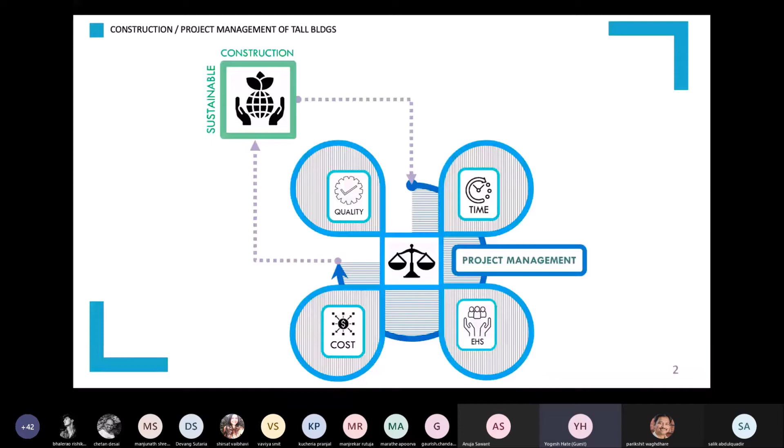So going back to the previous thing, we always talk about projects in terms of their quality, the time taken to take the product to the market, or the cost efficiency on a square feet basis. But there are so many other aspects that overall lead to the project management criterion of a particular project. It's very, very akin to an iceberg - what you see at the top is probably one-fifth of all the processes that go into it. So I'll touch base on a few of these.

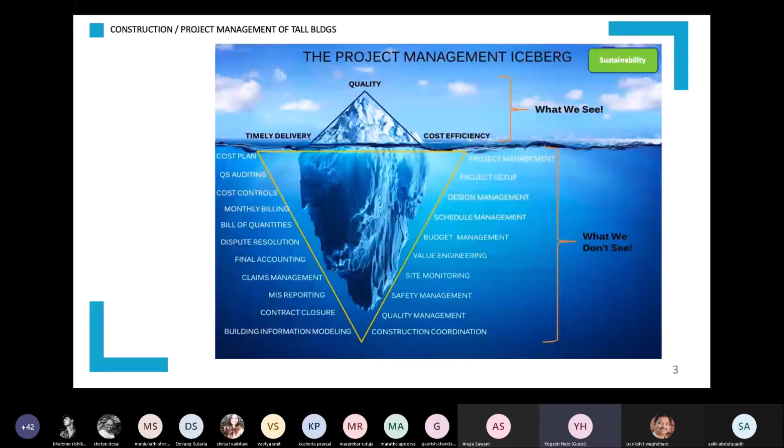There are quite a few videos I have that I would like to show you, permitting time as well as my internet connectivity. Before we get into that, I would like to quickly take you through the traditional versus modular construction techniques that we employ. You will eventually be designing your buildings to suit these construction methodologies. This is not something just the guy in the field, or the civil engineer, or the project manager handling that project has to worry about - you will have to cater, you'll have to design to accommodate these newer techniques.

For example, the 2 at the bottom that you see on your screen, 3D printing or top-down construction methodology - very interesting, I'll quickly take you through this. The first 3, of course, are RCC, the standard way of doing buildings. Steel - slowly India has started warming up to the concept of constructing buildings in steel. And prefab - there are quite a few buildings in Mumbai today which have been built with prefab construction methodology, with some inherent flaws that we need to overcome over a period of time.

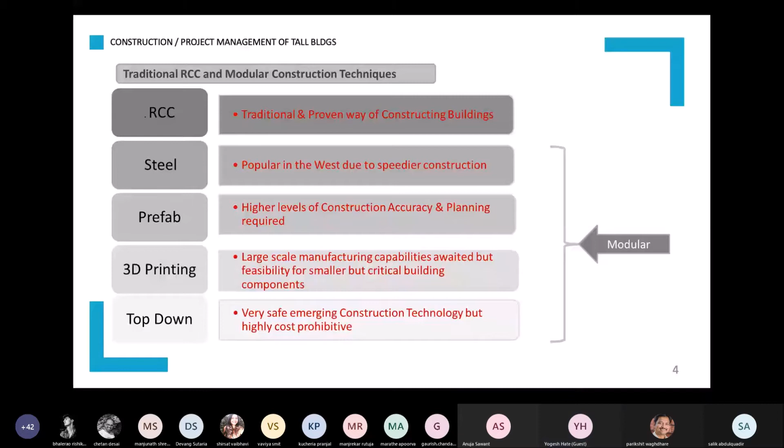So what happens with steel buildings is we get a very good speed of construction. They are lighter in their dead load, so you have lesser loads on the foundations. Most of the fabrication is done in a factory-like environment, so you have good tolerances and good quality control. The only issue, or the biggest issue, with steel buildings is their lower fire resistance, and the remedial measures needed to make these buildings fireproof are very costly - in certain cases, cost inhibitive. At the same time, we have lesser skilled manpower or technical know-how to build tall buildings in steel. But going forward, I feel this would be the technology of the future.

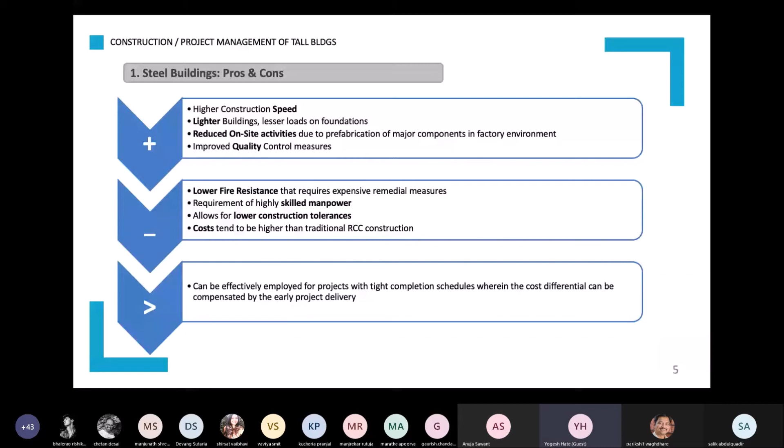So it's possible to build high rises with steel. Some of them have stood the test of time. The one you see on the right hand side is a photograph of a building called the Shun Hing Square Tower. It's in Shenzhen. Its claim to fame is that 3 floors were constructed per week. This is possible only with a steel building.

India, like I said, is slowly warming up to this idea. Eventually, you will be designing buildings in steel.

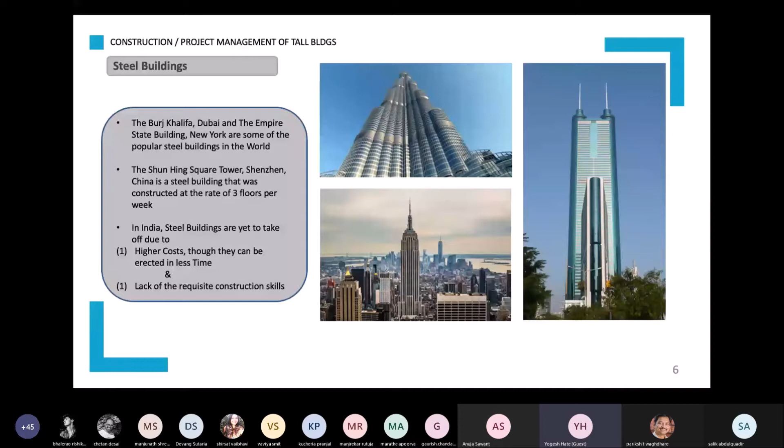Prefab buildings. What happens here is basic components, columns, slabs, wall panels, beams, anything you can think of, even the facade elements, they are all fabricated in a factory-like setting. They are precast, brought onto the site and assembled. It's more like a Meccano or Lego blocks kind of construction.

Only issue here is the construction joints. The treatment thereof has to be done extremely carefully. A few projects I mentioned in Mumbai have failed due to their inability to stop water ingress into these buildings. Very large projects, but unfortunately, the remedial measures cost probably half of what the original construction costs were.

This is a very interesting building. You'll find this on YouTube, you should really check this out. This is called the J57 Mini Sky City. It's in Changsha, Hunan province of China. Built in only 19 days. When I say built, it was assembled. There were about 3,000 odd modules or components that were brought onto site and erected, in a time frame of just 19 days.

That's why you see the number of tower cranes, 1, 2, 3, almost 6, climbing tower cranes that were required. Imagine the logistical nightmare it must have been for the guy on site to receive all these components in a particular sequence and erect them. From an architectural standpoint, you might notice not much scope for facade elements or elevational treatments, just a plain blank building.

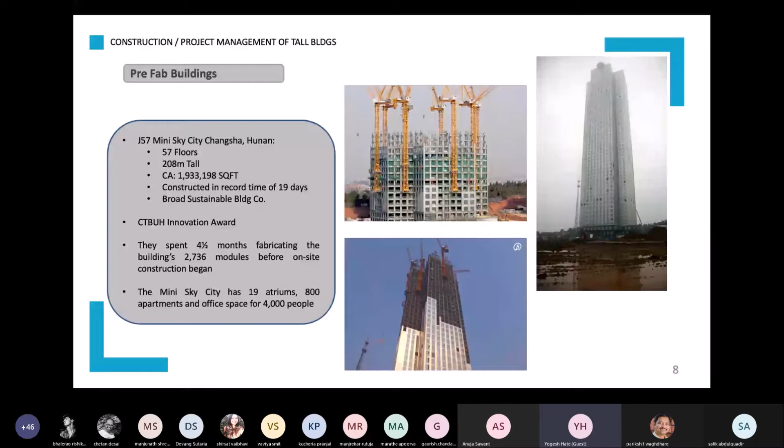But that's something that's coming up. Eventually these buildings will catch up. Another similar building is this T30 hotel. It's probably 2 kilometers from the building we saw on the earlier slide. I've been to this site. It's 30 floors, and now we are coming down to hours - it was installed in just 360 hours. It's a hotel building again. For whatever reason, both these buildings are unoccupied at this point of time.

But that's not the point. We are looking at construction technologies. This is what is possible. This is how time can be saved. Look up Broad Sustainable Building Group when you get a chance, you'll get good information.

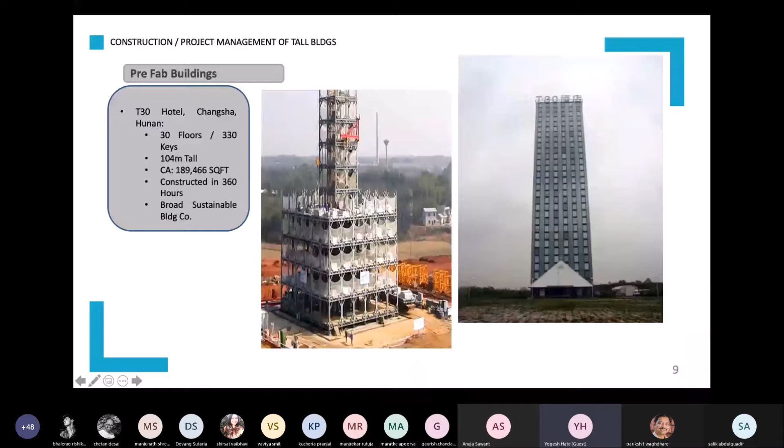Not to be left behind, this is again a building done with prefab construction technology in India. This is in Mohali, Chandigarh, not a very good looking building, you'll all agree I believe. But again, erected in just 48 hours flat. It's a hotel building.

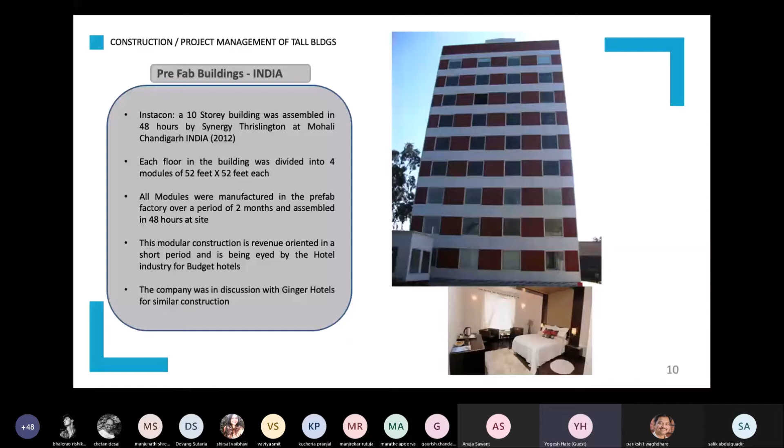Okay, prefab - there are certain components you'll have to account for when you get to the sites. I was talking about sustainability in construction, not a sustainable building, but sustainability during construction processes. We want lesser amount of concrete waste going to the landfill. So typically on our project sites, for formworks for stormwater drains or precast stairs, we have the molds ready. We do not fill them,

but any leftover concrete, provided it is the right grade, goes into these preformed formworks, and you have a good quality product. At the same time, you're not wasting that concrete. Wasting that concrete is not just the money you'd spend on throwing it away, but it's also to do with the landfill. So these are the green building processes that go on site.

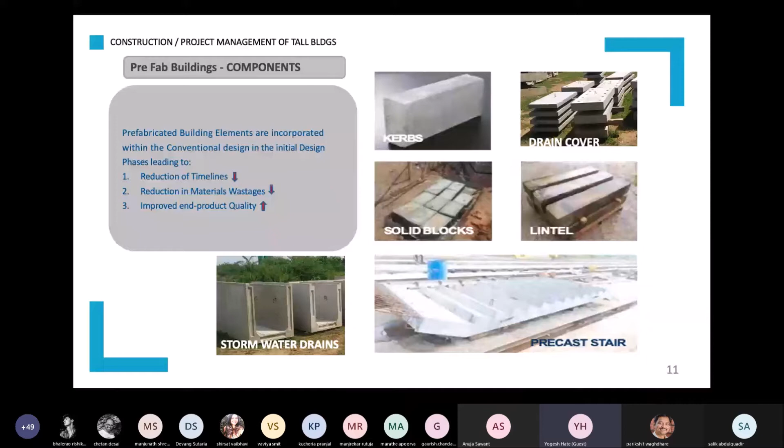Before we move on to the next technology, let me quickly summarize the construction time and cost - how do these buildings differ? Theoretically, I've taken a building with about 14 stories, 3 basements, foundations, and if you see the RCC column, you can finish the structure in probably 24 odd months, about 2 years, including excavation. The same building in steel can probably be constructed in 17 months. Again, this is very theoretical, just an exercise done so you understand the difference.

A prefab building could probably be completed in 20 months. So it's very clear that the steel building would be the fastest one to be completed. But when we move to the cost side, if we take the RCC building as a baseline for our cost, the prefab building is probably 20% over and above the RCC building cost, whereas the steel building can go as high as 25% more than an RCC building.

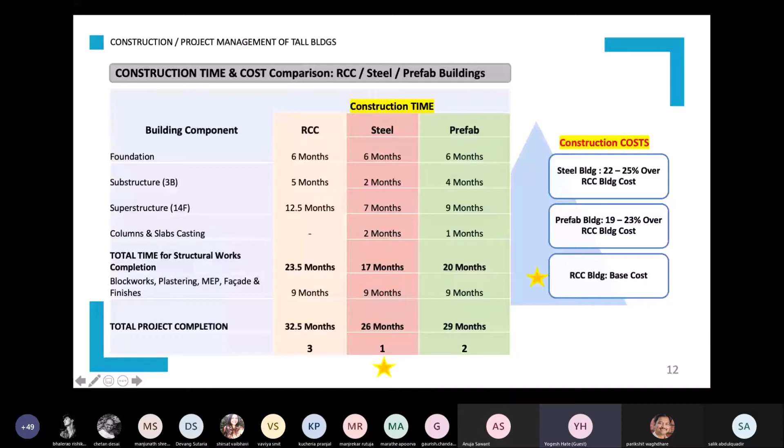3D printing - I'm pretty sure you're all well versed with the technology. It has been used for a multitude of products, but it has entered the construction industry as well. At this point of time, there's not a single building in India that has been constructed with 3D printing technology, to the best of my knowledge. But sooner or later this is going to be reality, and within the next 10 years of your career, you would be designing buildings that will be 3D printed.

Let's quickly look at a nice video, I'll show you a few of those. Good speed, highly mechanized operations, very safe for workmen, but the technology is still in its infancy, and you have to really tie up with someone who has a patent for these kinds of systems. So the costs at this point of time are very high. Full-fledged buildings have been built in the US as well as in Abu Dhabi. They call it low-cost housing, but it could very well certify as a nice villa somewhere in Lonavala.

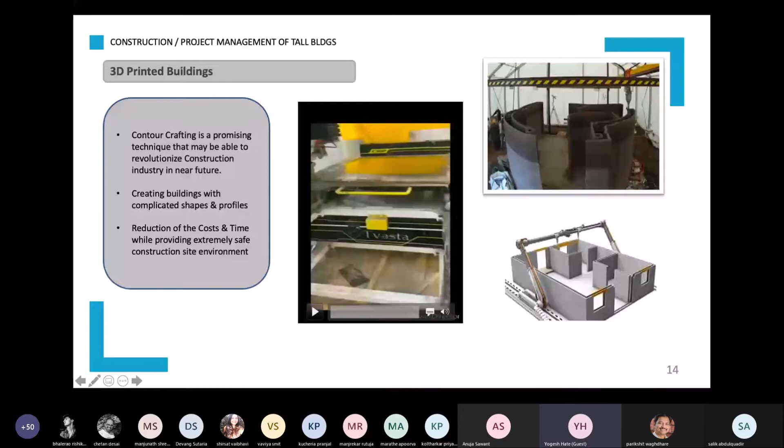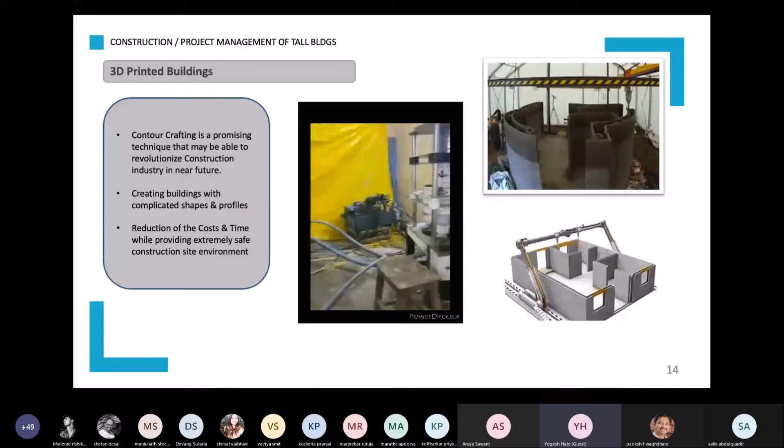Here's a video that was taken at IIT Chennai. This was a project by PhD students - one of them is an architect, the other is a mechanical engineer, and the third is a civil engineer. They devised this 3D printer using concrete. So now the civil engineer comes into play, where you have to design the mix of the concrete that is being laid out by that nozzle.

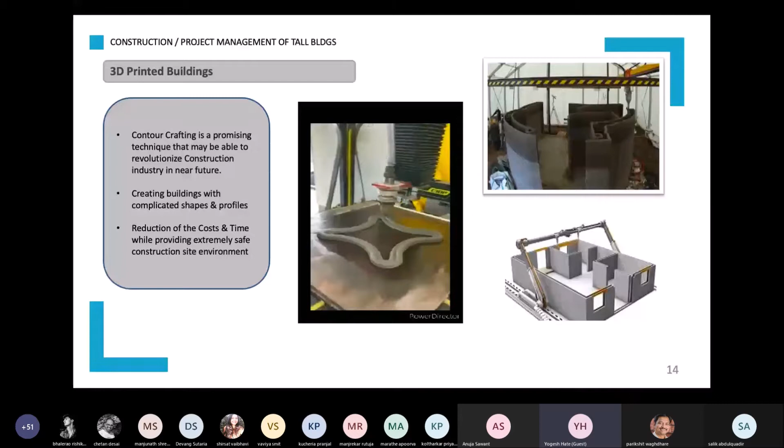This video was probably taken in the second half of 2019. The students were aspiring that by 2020 they would probably have at least individual toilet units built out of this technology for rural areas. So the key you see here is that the mix is very pliable. At the same time, as the height of the structure goes up, the lower layers solidify and they're able to take the load of the upper layers.

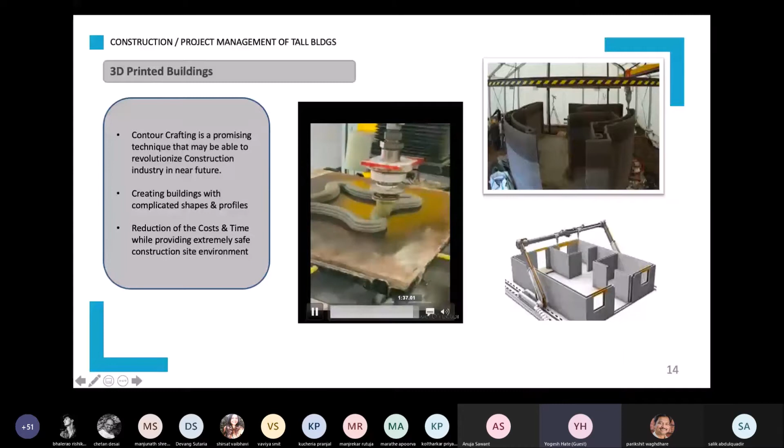Okay, the next one is the top-down construction methodology. As the name suggests, the higher floors are built first, and as you keep going, you come down to the ground floor. Very mechanized operations, very high speeds of construction, extremely safe. I have a video, you will very well understand. Again, this is a patented technology, and the costs are exorbitant, at least at this point of time.

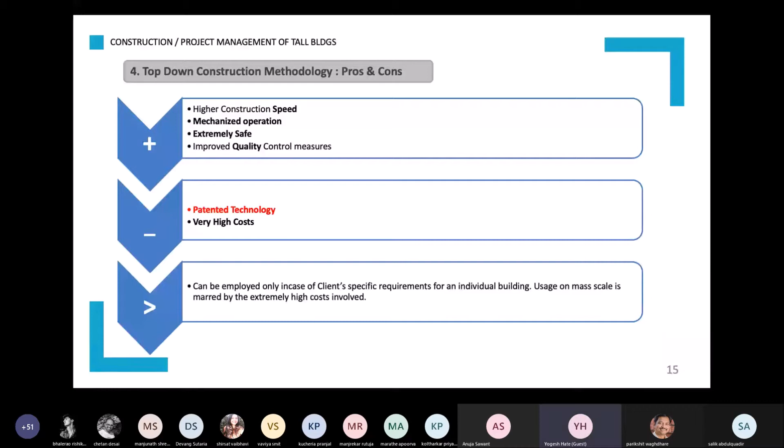So I have a case study here for you guys. These are two buildings called SRR3 and SRR4. They were built for Intel. Intel had, in the project brief, said that they wanted this construction methodology to be used. This is probably the first and only building in India to be constructed with the top-down construction methodology. Not very large buildings, about 0.6 million square feet each. They are in Bangalore.

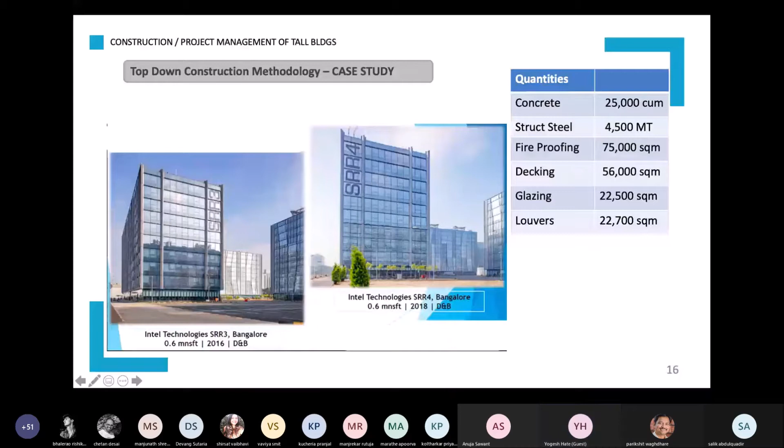So this is an actual site photograph. These are the three cores which become very critical in this construction methodology. I'll explain to you how. This is in the Sarjapur Ring Road area in Bangalore - that's why Sarjapur Ring Road, SRR 3 and 4.

The architects were Thomas Associates, structural consultant was Thornton Tomasetti. The design build contractor was Shapoorji, who had in turn tied up with ACOS Construction, who were the technology partners out of New Jersey, USA. Shop Architects US again did the interiors and facade. AKF were the MEP and fire protection engineers. So again, a short video - I'll pause as we go ahead and explain.

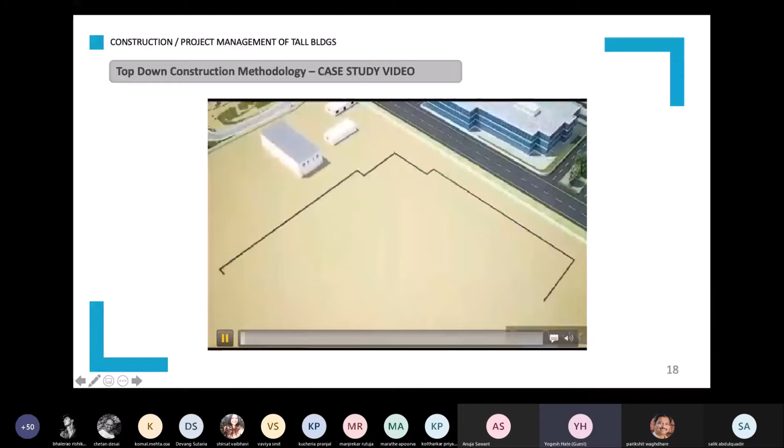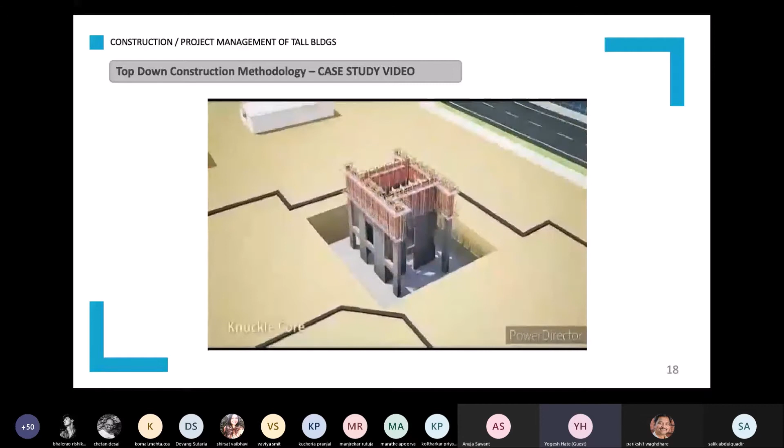So this is excavation happening basically. This is an animation - the foundation for the cores are laid. The cores are taken all the way up to the top of the building. In similar fashion, all the cores are finished.

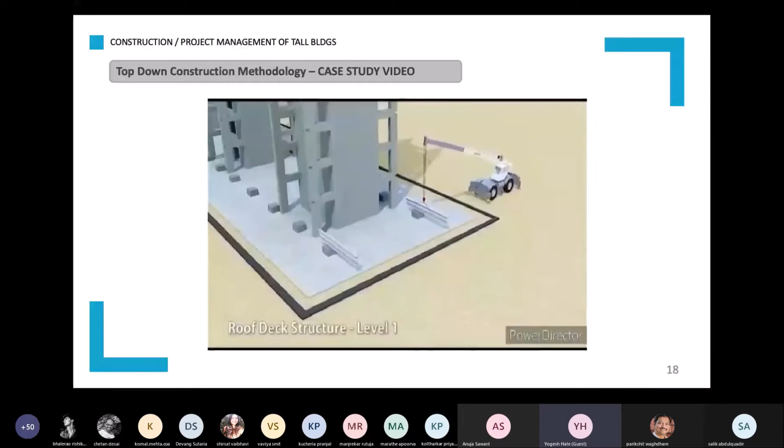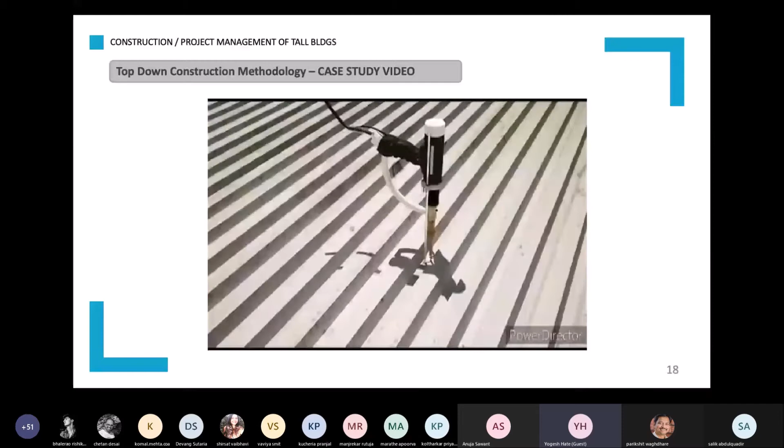Now what you see is the formwork being done at the ground floor. This is a steel decking basically. So you see the entire slab is all in panels. This is concreting being done.

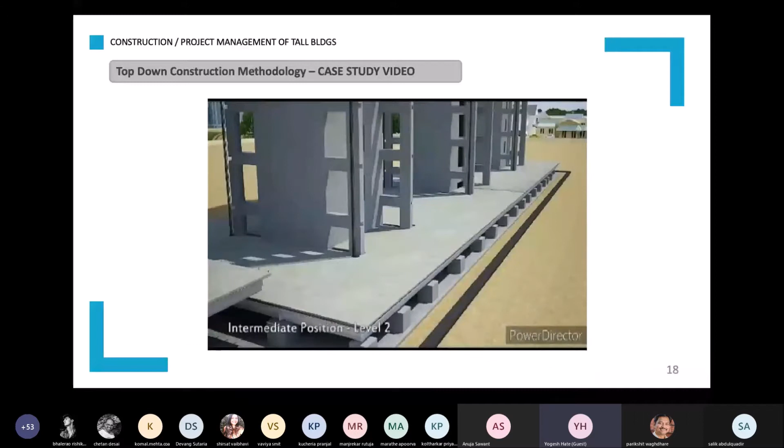These are the jacks to lift up the slabs into their location. So what happens is all these slabs are elevated by a height of about 1.2 meters, so that all the ceiling suspended utilities are installed at the ground floor itself - extremely safe for the workmen. Now this being the terrace slab, all the rooftop equipment has also been placed on top, and the slabs are incrementally taken to their position and locked into place.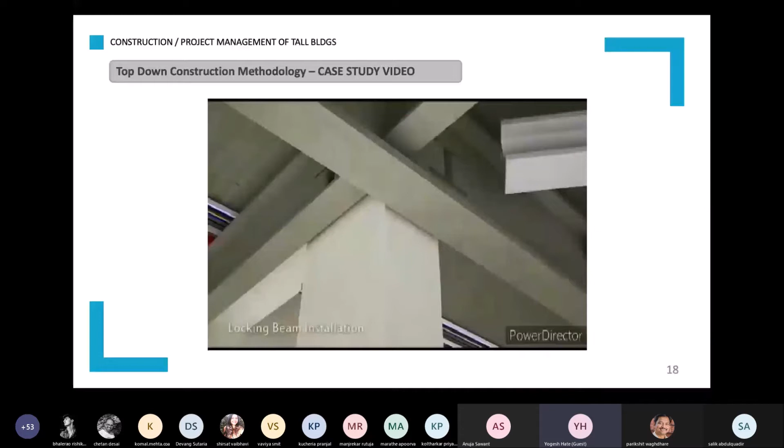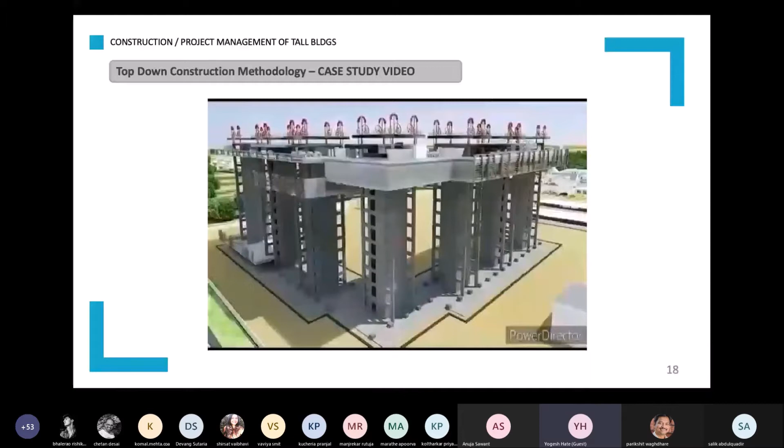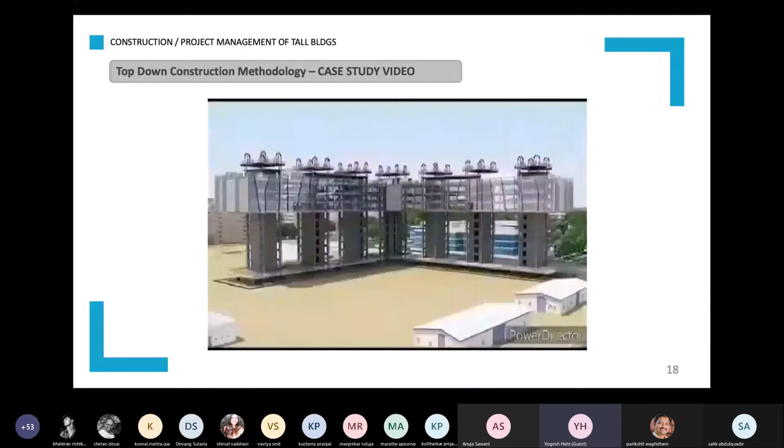So the terrace slab is done. Subsequently, individual slabs are raised into position. If you'll notice, the facade is also in position. And in a similar fashion, you keep coming down - that's the reason it's called top down. Typically, containers with all the interior furnishings and fixtures are placed on the slabs itself and put into position.

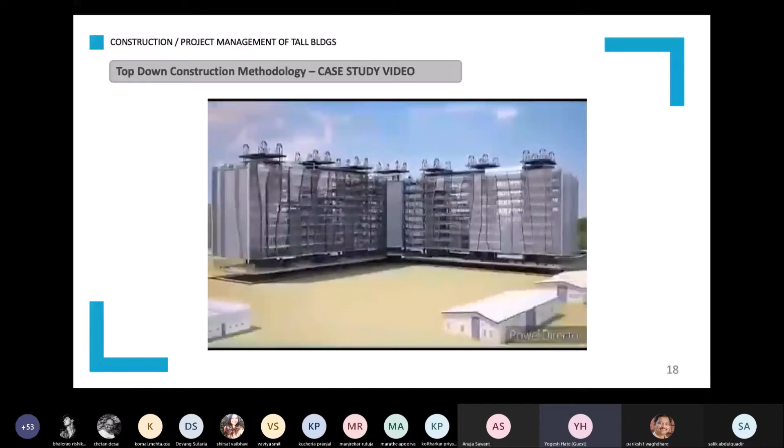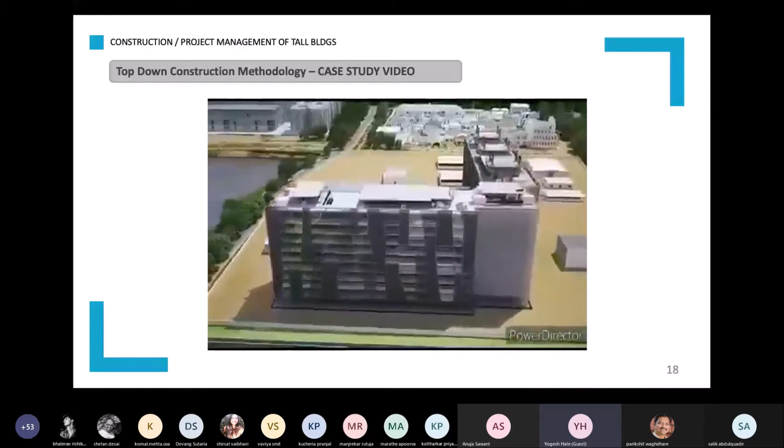Eventually, all your lifting equipment is taken out of position, and your building is complete. Basically, no one had to go to the top of the building. There were no issues with the height restrictions, working at height.

That's where it differs. Okay, so after having covered the construction methodologies, let's move on to the technology side of construction management, how sites today or how projects are differently handled.

There's a lot of talk about digitalization in construction, and we had a well laid out time scale on how things would eventually get into construction. I mean, today we are probably the industry that lags the most. We have been doing things like we have been doing for the last 100 years. Eventually, the goal is to learn from the automobile sector or maybe a FMCG sector, make it a conveyor belt kind of industry. So we'll look at some of the options available today.

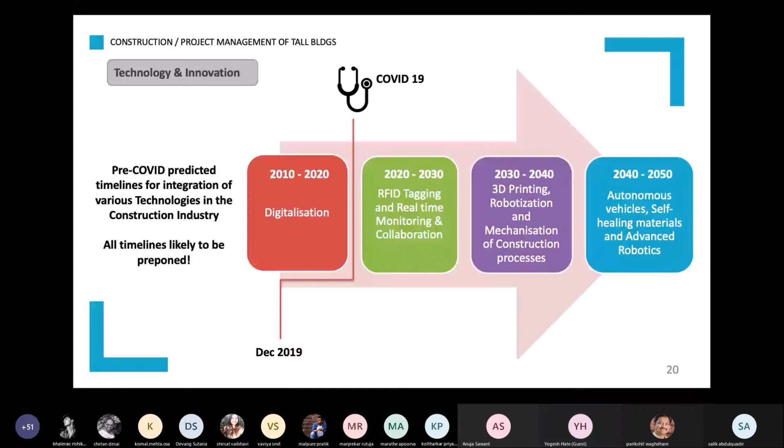So why focus on technology? Obviously to accelerate the construction deliverables, manpower is a big issue today. Reduce our dependency on manpower, increase our productivity, and so on and so forth. Real-time monitoring of all the parameters of the project. Almost have a dashboard kind of thing for all projects, and sitting at one location, you can virtually run your projects.

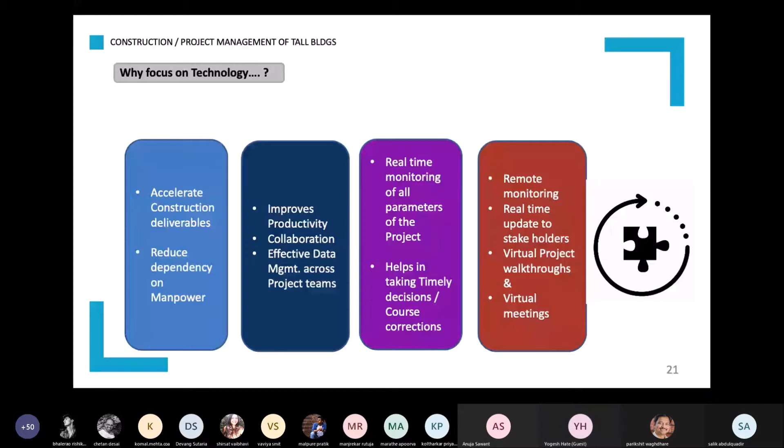Drones, typically you'll find them today doing marriage or wedding photography, but we have been using them extensively within our projects, not only for construction monitoring, but also surveying. I'll show you a few images of the surveys done by drones, and you'll be really surprised. The human intervention or the manpower requirement with these inventions has literally gone down by multifold. So we are using them for building surveys, construction site inspections, project progress reports, a live feed from sites, promotional photography or marketing collaterals. That's another aspect.

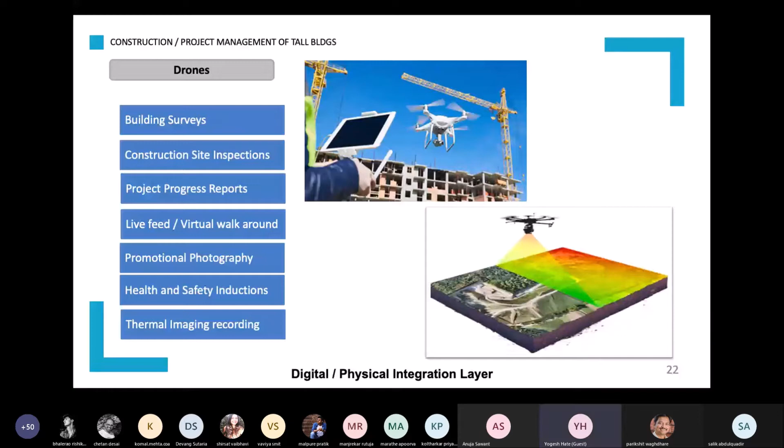Here I might have to get out of the screen. Okay, for some reason this link is not working, but we'll come back to that. I have this covered in one of the other slides as well.

This is one of our actual project sites. Now, nothing great. I mean, a camera installed on a neighboring building can probably give you the same visuals, but it's not limited to that. The access that I have used for this particular application, as in for our presentation today, is a limited version, but I can actually zoom in.

If there's rainwater, I can calculate the quantity of rainwater that has accumulated. I can check the sizes of the foundations in plan, of course. I can check the column to column spacing. I can check the sizes of the columns. So someone sitting in the head office or remotely from anywhere, he can do multiple things which were previously unheard of.

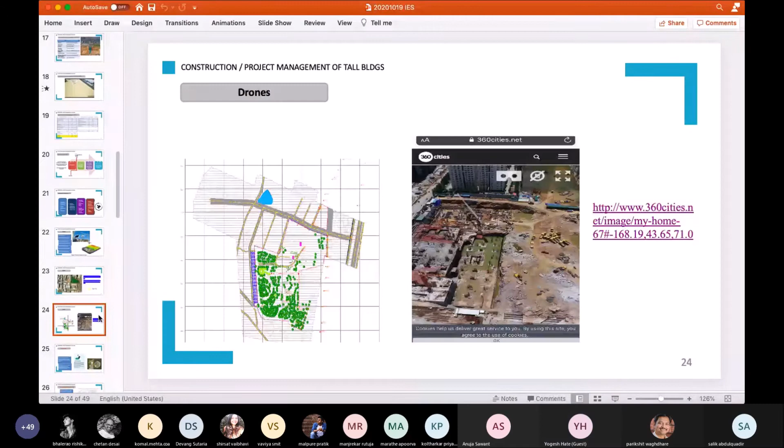Again, this is a survey. It's a very large scale of a huge area. This is all done by drones. The count of the trees is accurate. There are a few structures. I'm not able to zoom in further on my screen right now, but if I go through the application...

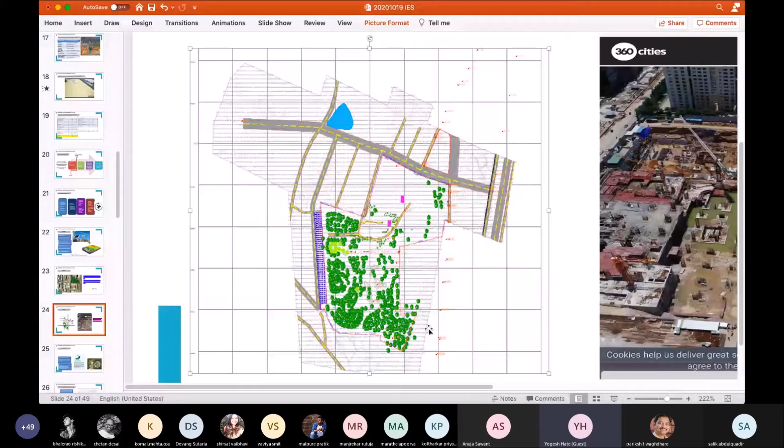All the gray lines that you see are actually spot levels. These roads are existing roads that were captured by a drone. The trees, the accurate count was taken by the drones. The drones have a capability not only to do it in plan, but some of the peripheral trees, we could even calculate the girth of those trees. So these are the possibilities today with the drones.

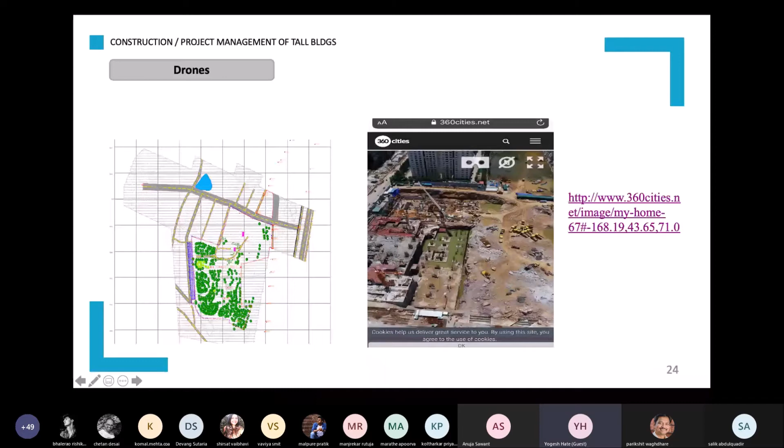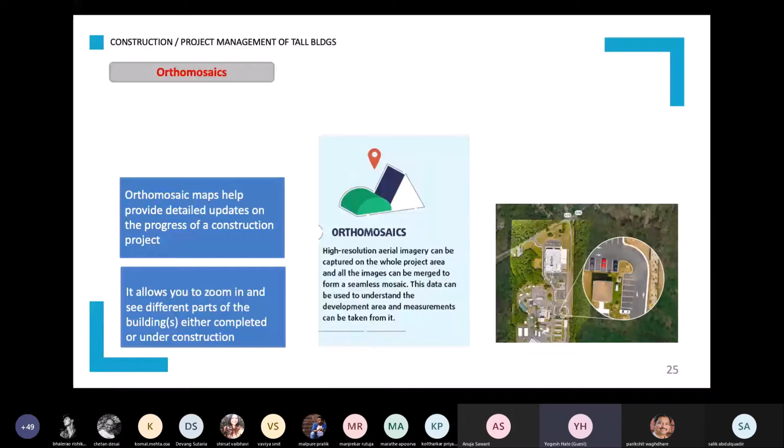Another concept that you're going to be dealing with in future is orthomosaics. Again, extended application of basically drone photography, but more for as-built surveys, or maybe eventually, how do I put it? Probably let's leave it at as-built surveys at this point of time for the want of time.

Same thing with 3D laser scanning. We are actually utilizing this technology wherein we go in and buy old properties, and it's not physically possible to do a survey of each and every floor to probably inventory the amount of furniture or the equipments or whatever that is in that building. With drones and through 3D laser scanning, this has become very quick and easy today.

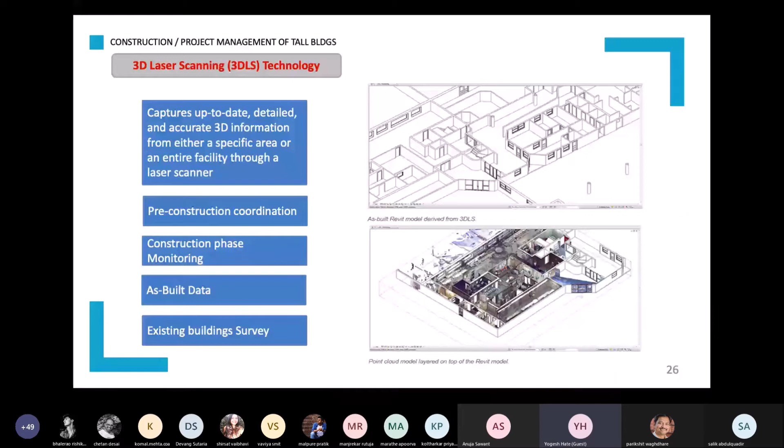Okay, this is something very close to my heart. I'm driving this very extensively in my organization, and I have a few slides that I would like to take you through. This is the future, guys. I mean, building information modeling. You are eventually, within the next few years, going to be working on BIM models rather than the 2D drawings that you might be used to.

With the translation from 2D to 3D models, you can also add the time component, as every project has a schedule, be it in MS Projects or P3 Primavera. This can be integrated with the BIM model.

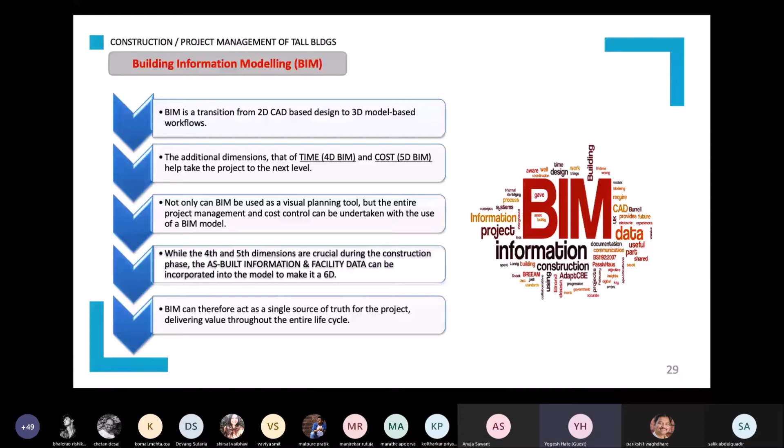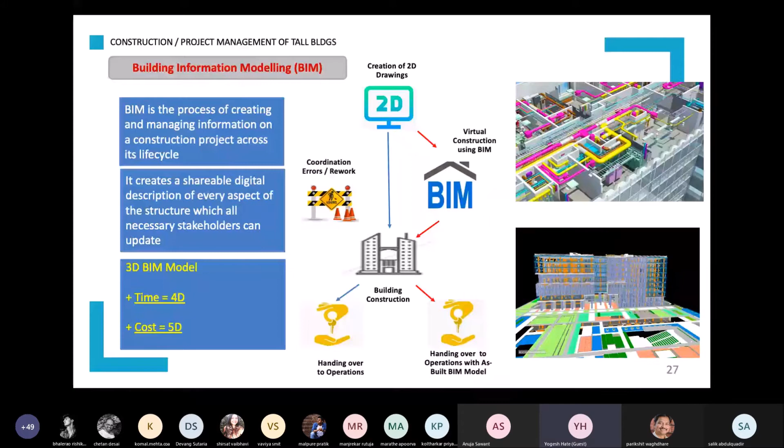There's a fifth dimension to it, it's called 5D, and you can actually add cost parameters to your BIM model, wherein you can devise your contractors' and subcontractors' payments based on the amount of work done just through the BIM model, or check your cost to date. I'll show you a few simulations, and that will make it more clear.

So when do we start with BIM modeling? It has to start right at the conceptual stage. You move on to detailed design, design documentation, and further use the model for simulations like CFD analysis for wind forces, design of your facade for glare, daylighting, or sun shading.

Eventually you hand over all this to the site team or project team for construction, who uses it for fabrication of critical components. It is used in construction logistics, the number of tower cranes required, what your access is going to be while in the foundation, when digging, and how access will be above ground.

You add the time schedule to it to make it a 4D BIM model. You add the cost parameter to your model to make it a 5D model. And eventually this is what you hand over to the operation and maintenance team for their usage.

It doesn't stop with operation and maintenance. At RMC, we are looking all the way until 50 years from now when the building will actually be demolished, and that's where we find use in this usage of BIM.

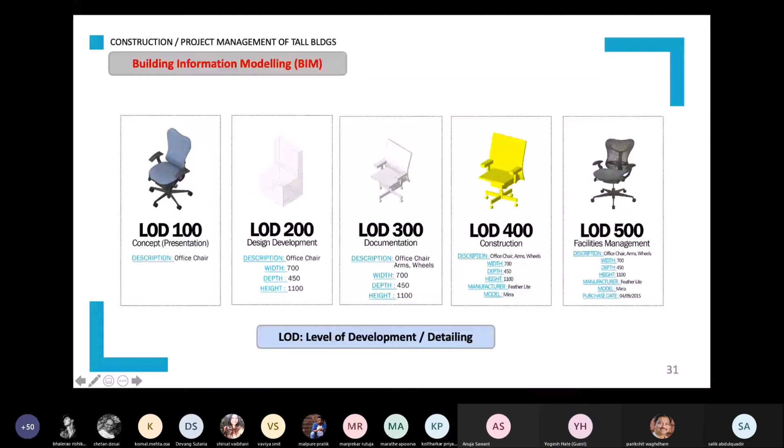The video does not have any audio.

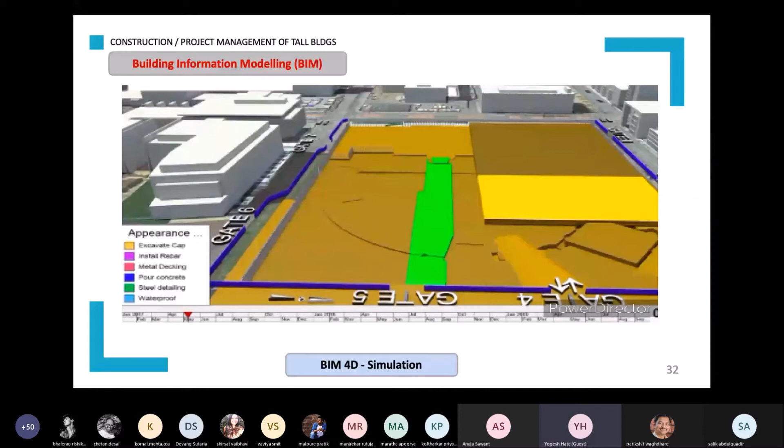So if you notice at the bottom, there's a time scale, and as time passes, you can see what all activities are to be completed to finish this project on time.

So it's a stadium basically that is being built. If I read it, it says April at the timeline here where my cursor is. So in the month of April, this is where, if everything is going right on the project site, the project site would be. That's the simulation basically. But this is just step one, the next video is even better.

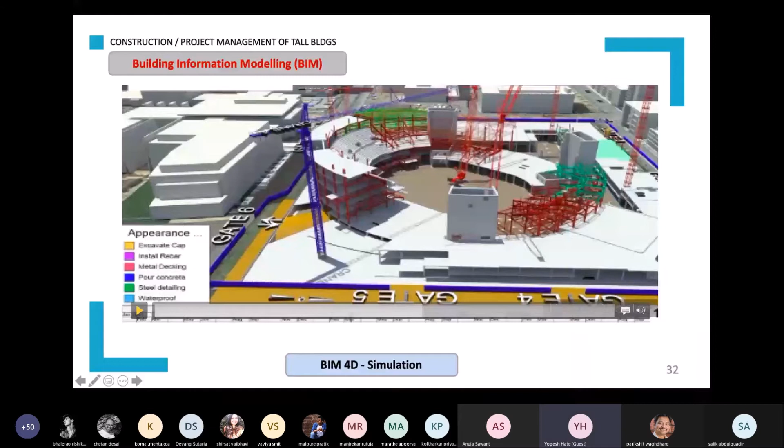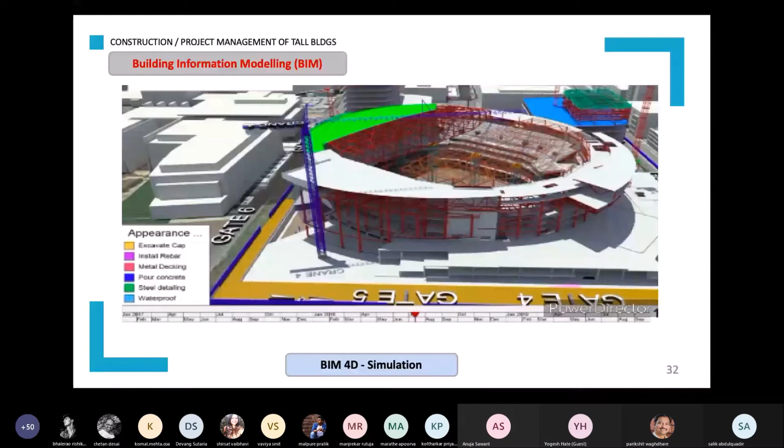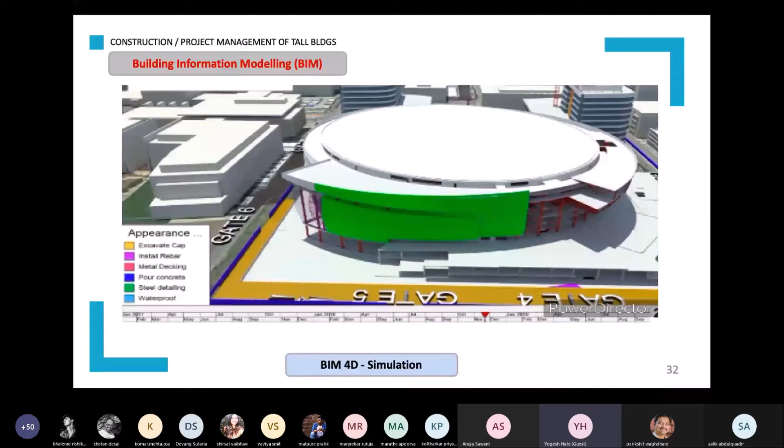So with the passage of time, it's showing you what all activities get completed. Okay, so this is another project.

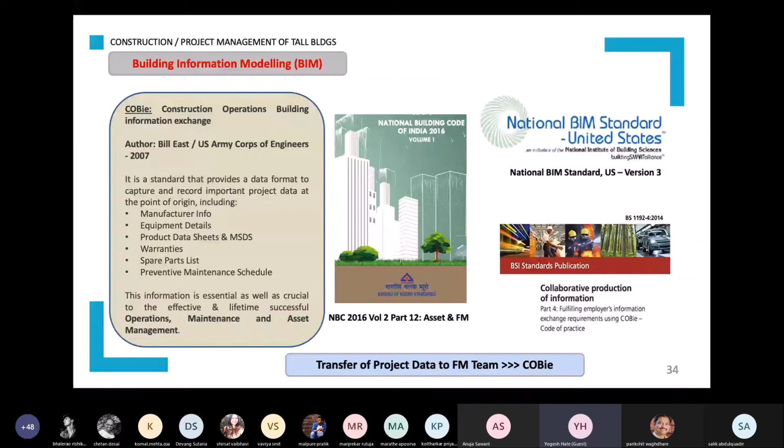So, okay, we spent a lot of time on BIM. VR meetings, it's becoming common today with the BIM models that we have. At this point of time, we have some rudimentary BIM models, but with the COVID pandemic, in the last probably 6 months, I've spent more time on Zoom or MS Teams meetings, also on BIM 360, wherein we are reviewing models actually sitting at 4 to 5 different locations. This is a reality.

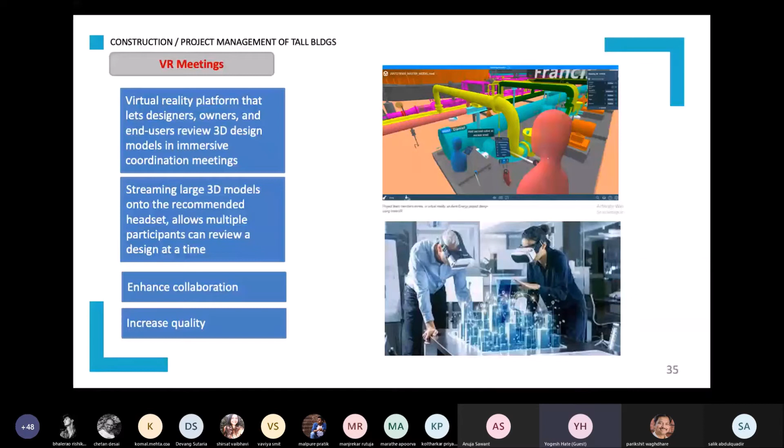Mobile technology, this is catching on pretty soon. Now we are almost eliminating pen and paper from our construction sites.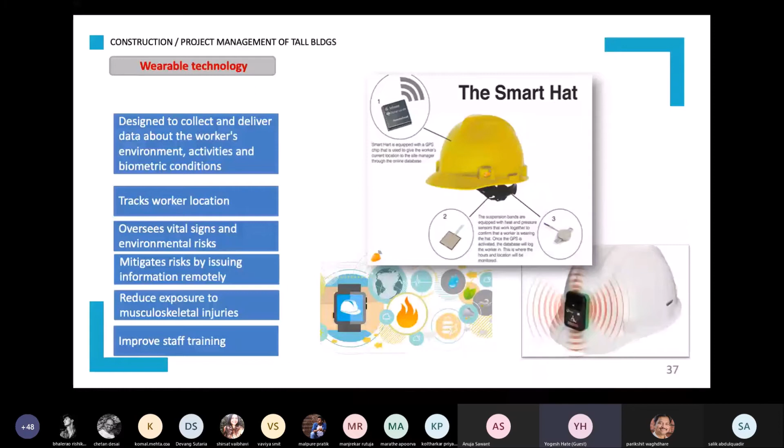Now there are a lot of CM/PM tools around all this movement from BIM 2D all the way to BIM 6D. We are talking presently to two of the major manufacturers, RIB and Procore, where all our processes are digitized. We are looking at their compatibility with our accounting software like SAP. But this is coming, this is coming pretty soon.

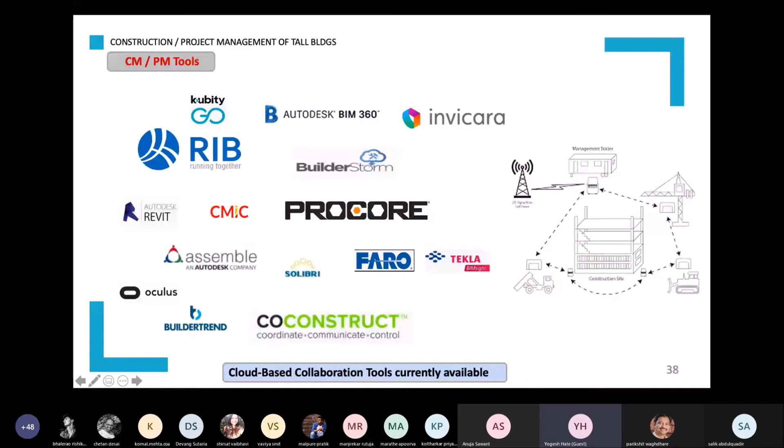While we talked about foreign products, we have actually tied up with a company called nPulse, based out of Chennai, a couple of enthusiastic IITians with no knowledge of construction. But they've taken up the challenge and are providing us services where all our construction site operations are, if not 100, at least 75% digitized today.

So anything related to the project, be it contractors, daily reports, material indents, labor attendance, safety integration, quality reports, BOQ generation, costing and budgets, project scheduling, any documents like specifications, drawings, minutes of meetings, RFIs or issues raised, they are all digitized. At the project site, based on RBAC, which stands for role-based access control, a site supervisor will have access to RFIs and quality-related issues, while the project manager will have access to the budget and BOQs as well.

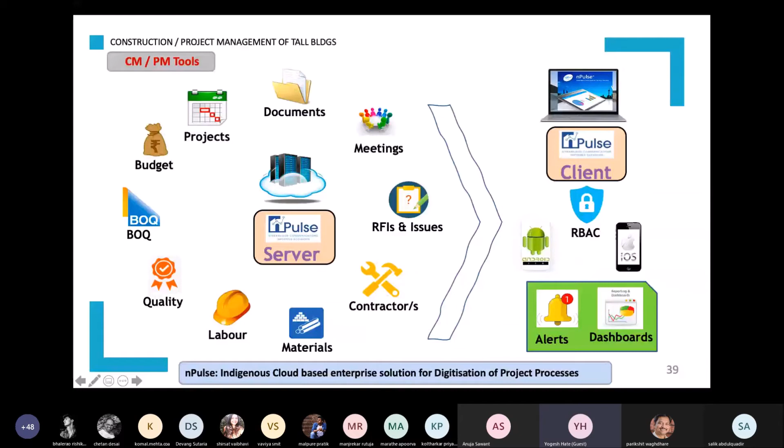But all this is possible just on a screen, available on screen as well as on the smartphone.

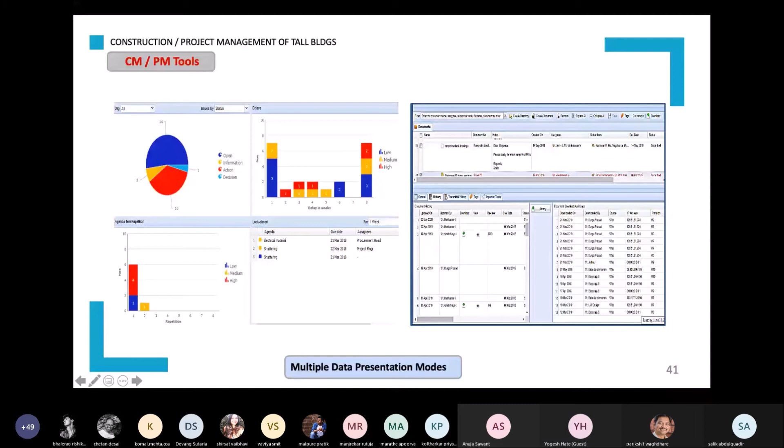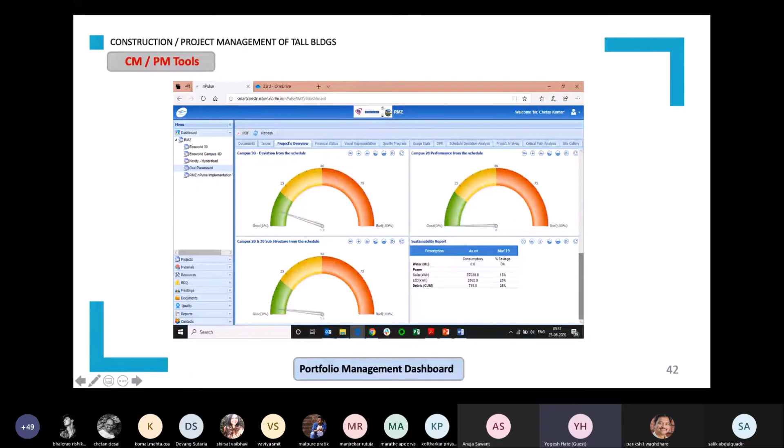At the site level, quality inspections or RFIs are all being done through mobiles, the nPulse app. So there's a timestamp and authentication on who has entered this data, so those kinds of discrepancies are taken off, and everything is real time.

Even if someone is entering data in the basement, for example, where there is no mobile network, as soon as he comes into network range, the data he has entered gets into the server and is uploaded and distributed to the requisite parties.

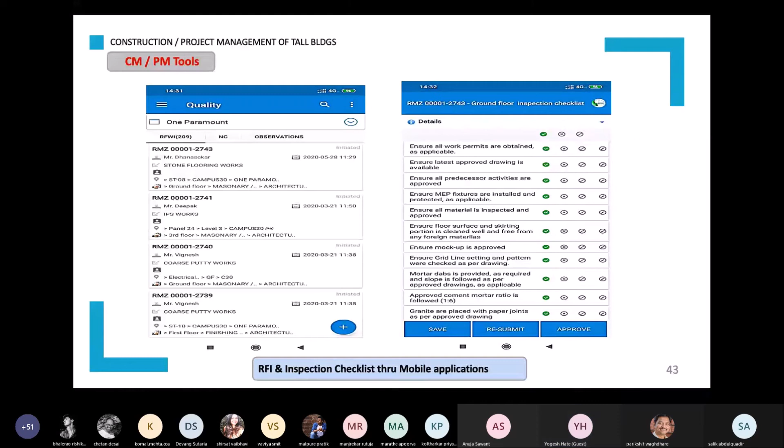Let me quickly take you through a few photographs. I'm not an architect, I'm a site guy, so let me tell you what we had to do differently from what the architect had suggested on one of these projects.

This is a project in Mumbai, somewhere in Malad, 4 towers, high rises, 45, 51, 53, and 56 stories tall. 2 of the towers have been completed, the other 2, one has been topped out, and the 3rd one is still under construction.

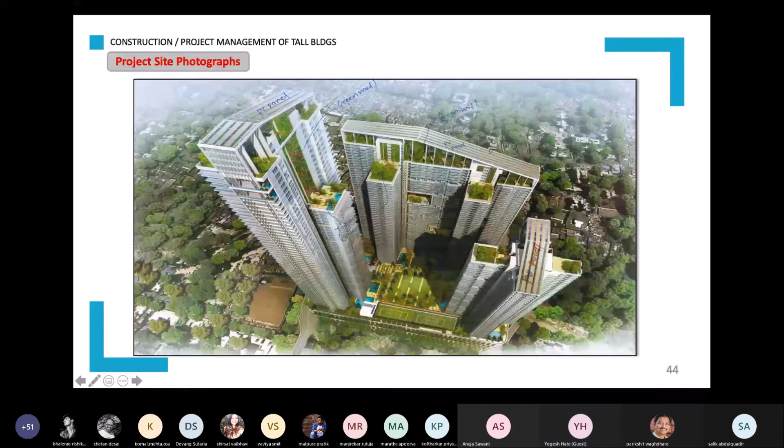Okay, so these are some of the site photographs. As we go taller, it becomes increasingly critical in taking the men and material to their requisite work locations.

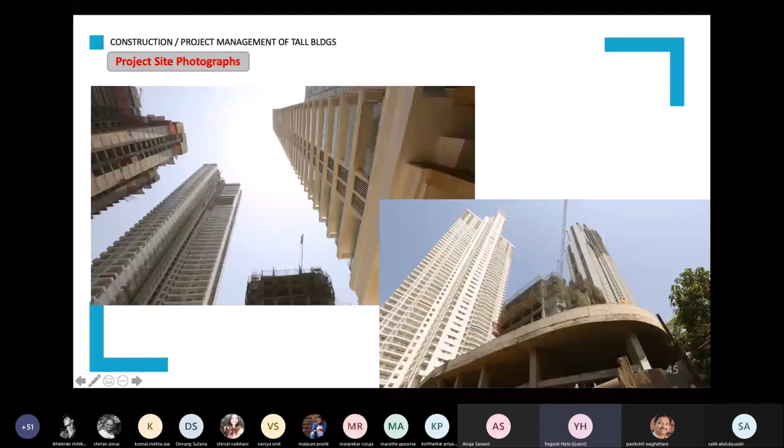This photograph is taken from one of the wings of a completed building. Here, work is happening at these locations. Same thing here.

So as we go taller, it becomes increasingly difficult to manage these kinds of projections or notches. So that's something you might have to bear in mind. Productivity as well as safety goes down, and the time taken to execute these kinds of intricate architectural details increases.

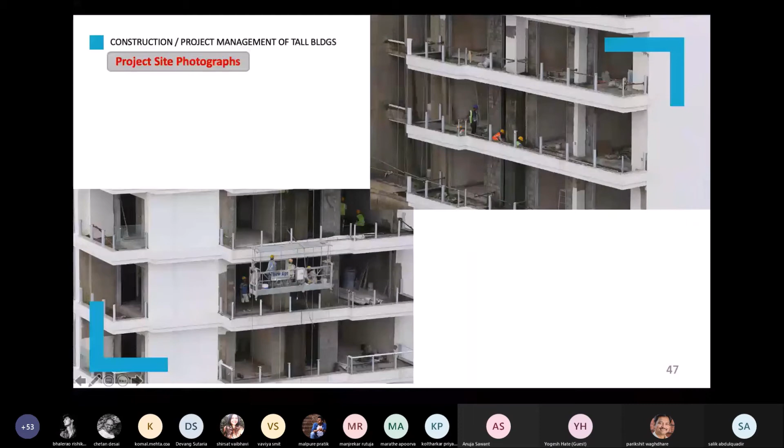So again, bad design, bad detailing. Okay, this photograph on the top I have chosen for a particular reason.

As we go taller, what we did on this project is we eliminated most of the block work. Instead, we moved to structural walls. Since this was done with aluminum formwork, all the internal partition walls within the apartment got cast simultaneously. So we actually limited the amount of block work, though you see some here, it was minimized.

You can imagine the amount of materials that has to be brought into this location. He's punning this with the gypsum plaster, and the amount of waste it creates, which again has to be carted all the way down to the ground floor and then taken to a landfill.

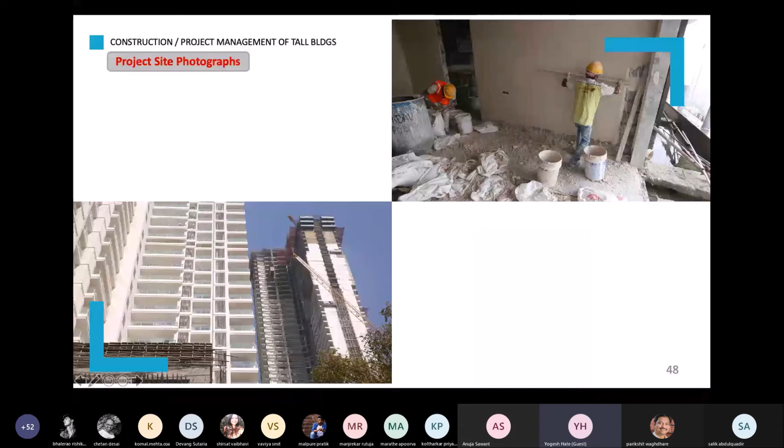Now imagine having to hang from 53 floors above ground and trying to install these fins, and later on probably maintain them. So we had to change the details. We had to go floor to floor, so we could install them from within the shaft rather than having to do it from the external face of the building. Just bringing to your notice a few things wherein design plays a critical role even in site execution.

This is the last slide I have, the 49th one. I'm going to leave you with this thought. Today, every other building is going for LEED certification. It is becoming a norm. You need to acquaint yourself with these requirements.

Now, LEED is becoming standard. We have moved on to WELL, where the requirements are even more stringent, and we have an aspiration to have at least one building that is net zero. So net zero could be net zero carbon, net zero water, or net zero energy. We are working on that.

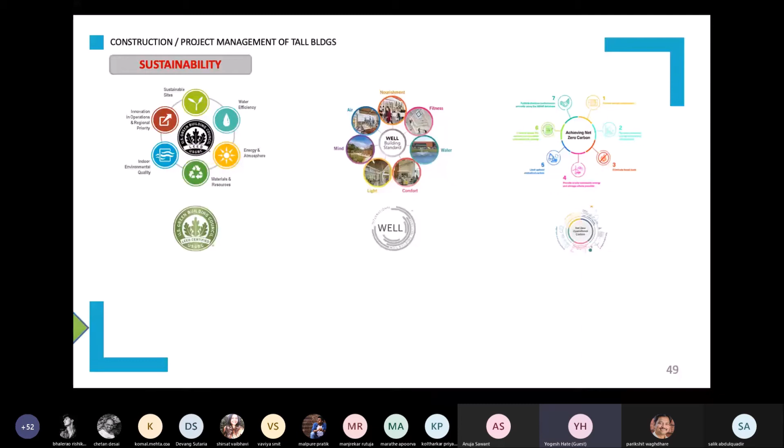This is the future, guys. This is what you need to equip yourself for. That is all I have. I'm open for questions. I hope I did justice to my 45 minutes.

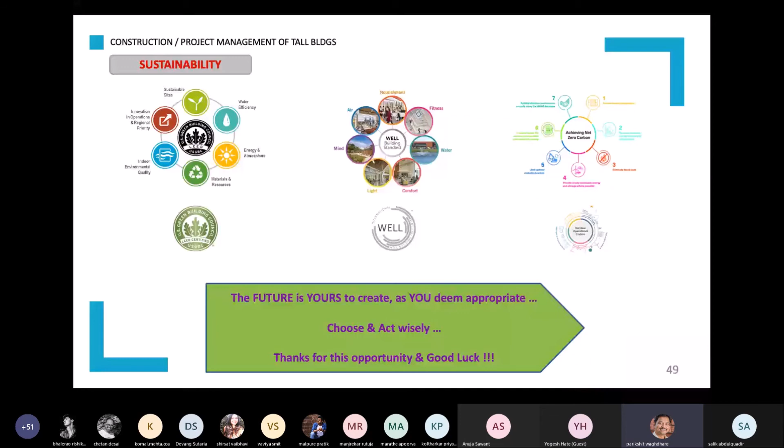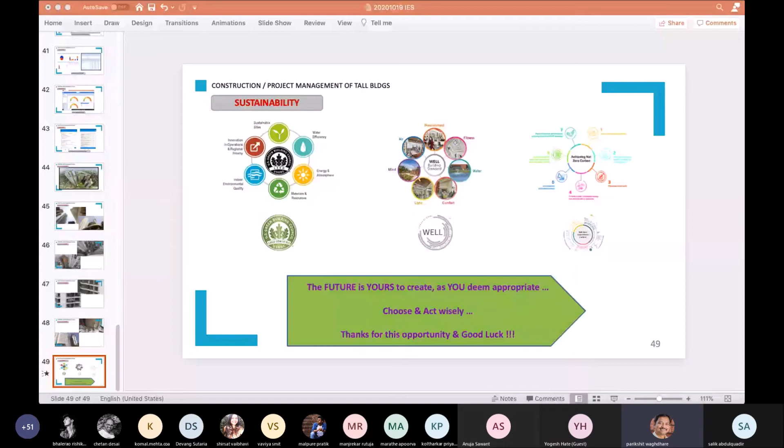Am I audible? Hello? Hello, sir. Yeah, am I audible? Hello? You are, yes sir. Yeah. Okay, so somebody is asking the question. Hello, sir, can you hear me?

Yeah, so I had a question. So you were talking about the manpower that is required for... I'm sorry, we are losing you. You are not audible, Muskan, you are not audible actually.